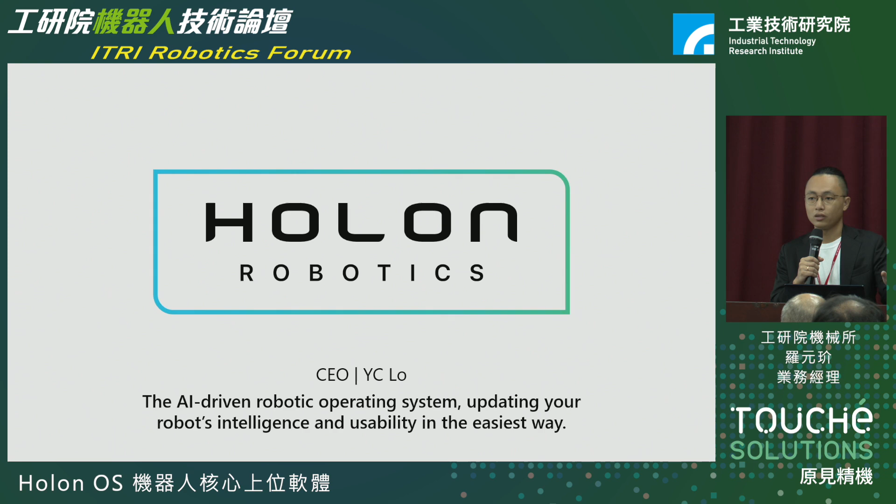We are a startup currently incubated in ITRI, and our vision is to develop the first AI-powered robot operating software to turn standard and general robots rapidly into intelligent multitask robots. So that's our vision. But first, we have to take a look at the current robotic systems.

Here's one fact. There are only 90,000 robotics operators and engineers around the world, but the number of industrial robots in operation is 40 times the number of robotic engineers. And the number goes crazy, to 100 times, so you can easily feel the intensive workload of the robotics engineers. But it also points out two facts. First, the rising robotic automation needs. And second, the labor shortage issue, because for the young generation, it's really hard for them to be willing to go to the manufacturing field.

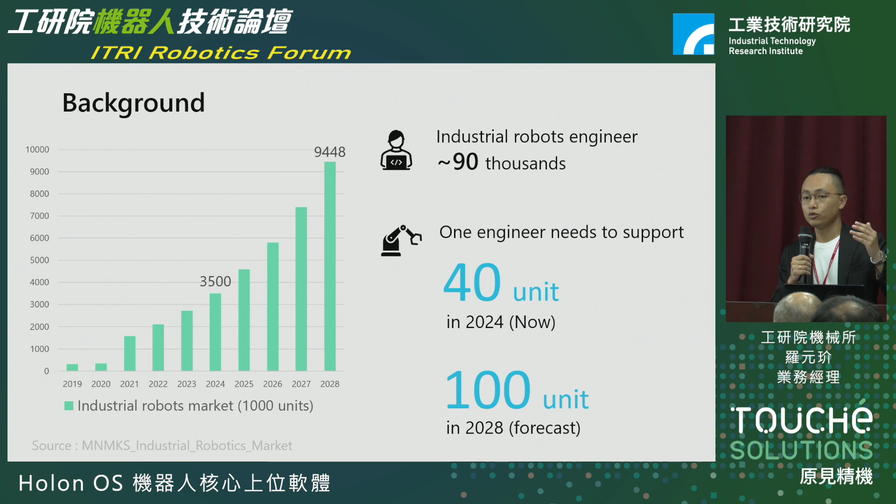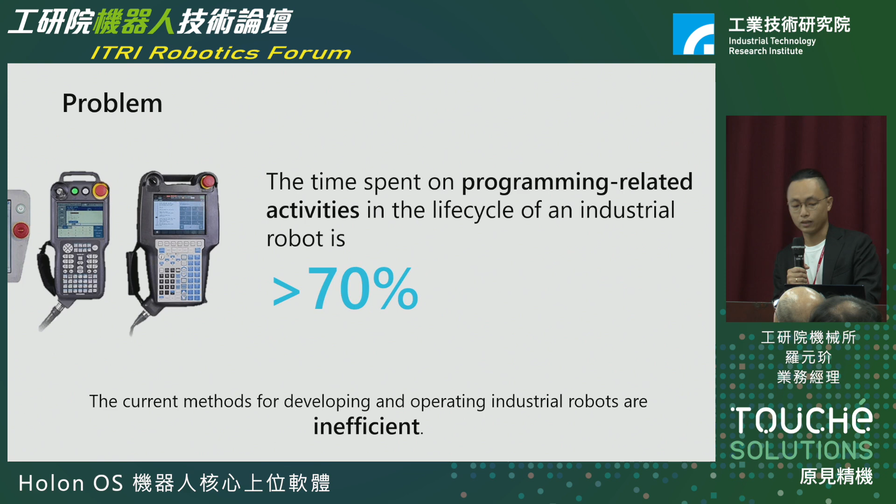So the problem is, for one robotics engineer, 70% of their time is spent on repeated robot programming to fit one application or one task. And to train a junior robotics engineer into a senior robotics engineer requires 2 years. And for them to work standalone on a project or a new application to test, develop, and deploy, it requires 6 months. So the current methods for developing and operating industrial robots are inefficient.

So our solution is the Holon OS control panel. We provide a new experience for operators and robotics users, not just a responsive touch experience. We also embedded an IPC with the latest CPU and GPU, and our self-developed Holon OS. We support multiple robot brands like Fanuc, ABB, KUKA, and Mitsubishi, and various sensors like 2D vision, 3D vision, etc.

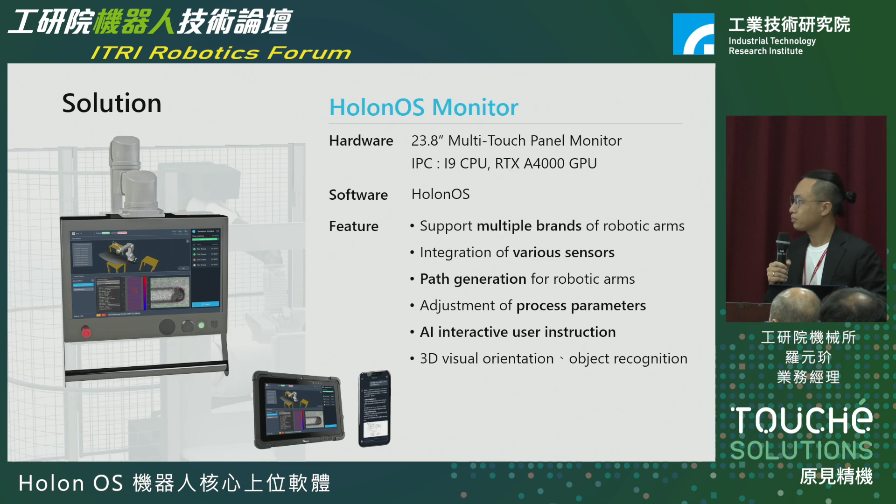And we feature automatic path generation without any programming, and we designed the process parameters to be separate from the path. And also an AI interactive user instruction UI.

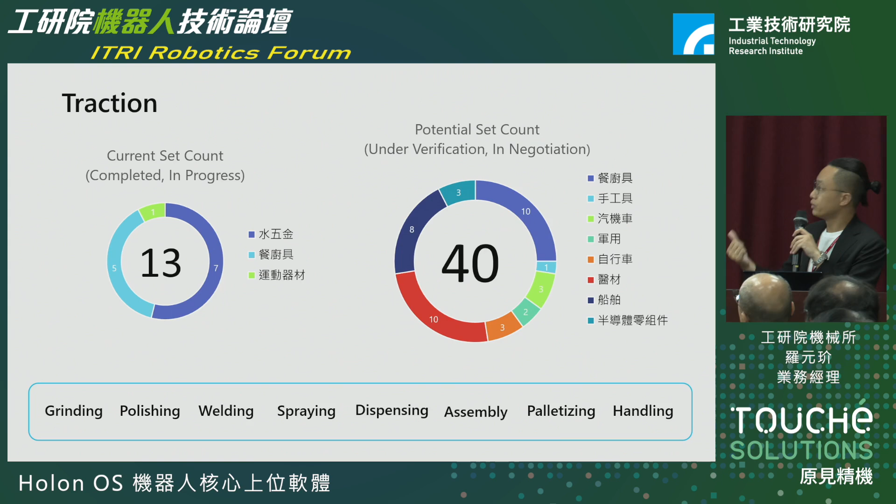As for our recent progress, we have deployed 13 of our Holon OS control panels across multiple fields, and there are potentially 40 units in discussion and negotiation, covering grinding, polishing, and dispensing, semiconductor components, shipbuilding, medical devices, bicycles, and even the military.

One of our success stories is Atlantic Chef. It's a famous kitchenware knife manufacturer in Taiwan. Before us, because they are a niche market, no system integrators could help them overcome the problem. The challenge they faced is that, due to the pre-processing in manufacturing, there is inevitable size variation. So traditionally, a fixed-path robot for grinding and polishing is impossible.

So 2 years ago, we used our Holon OS and laser compensation technology to help them overcome everything. And last year, we deployed the second repeat order and finished in 3 months. And right now, they have 20 existing industrial robots ready to upgrade to the new intelligent software. And they have increased production capability by 30%.

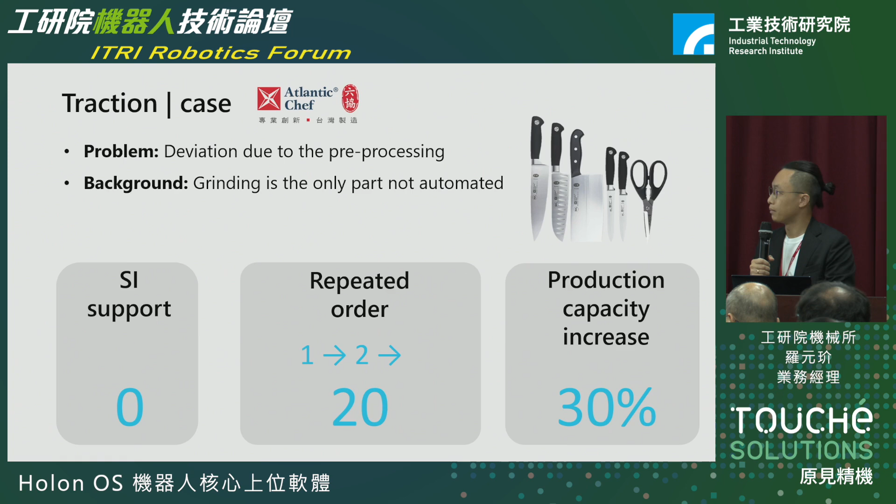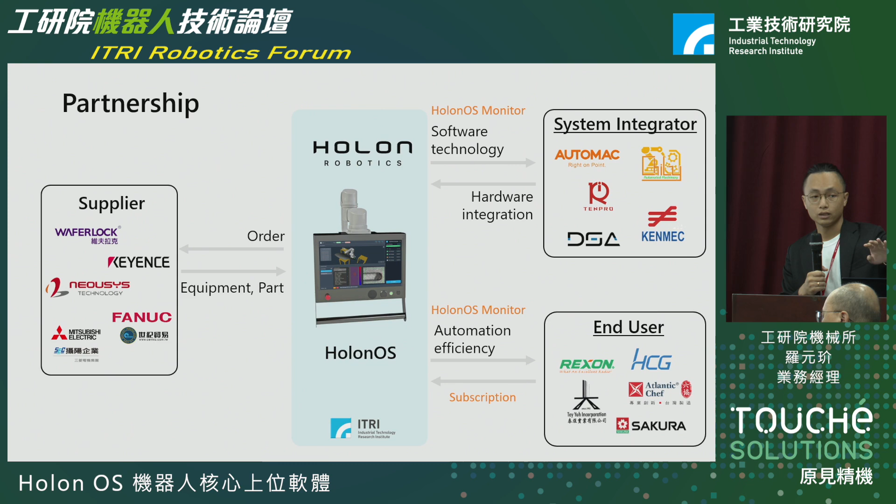So we are a startup. Our business model is building strong collaboration with key partners like IPC, robot, and sensor makers. We integrate and make it into ready-to-use and easy-to-use functions and sell to system integrators, to help system integrators in Taiwan quickly go to the international market and sell to end users.

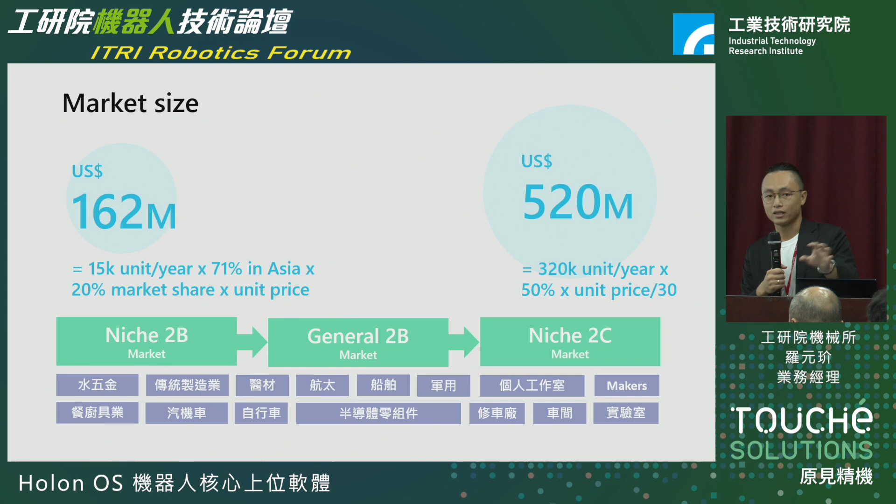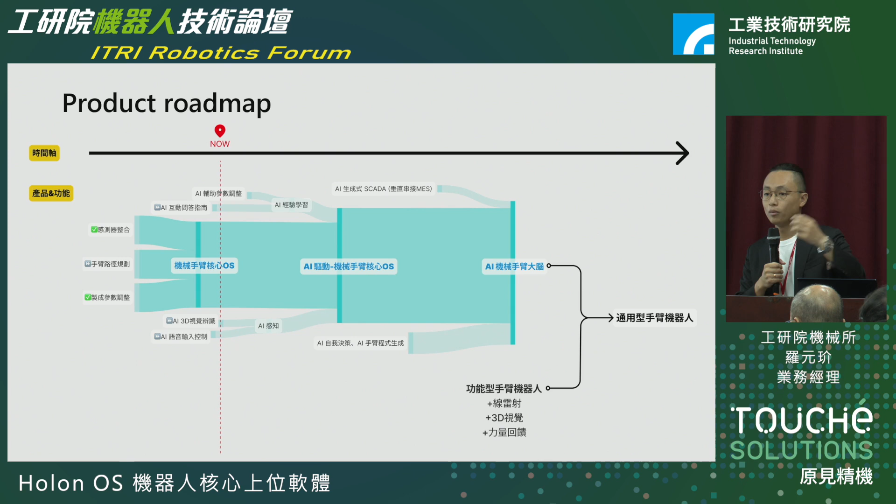Personal workshops, makers, and even repair stations or laboratories require robotic hands or robotic assistance. And along with that, there will be a lot of AI, robotics, and safety topics. So in the roadmap, you will see the reason we try to develop fully automated and intelligent robot brains. So when the day comes, you can buy a cheap and affordable robot system for your home or your laboratory.

So right now, we have integrated multiple robot brands, multiple sensors, and even PLCs. And we especially designed each technical function as a modularized block. You can think of it as a neuron of the robot.

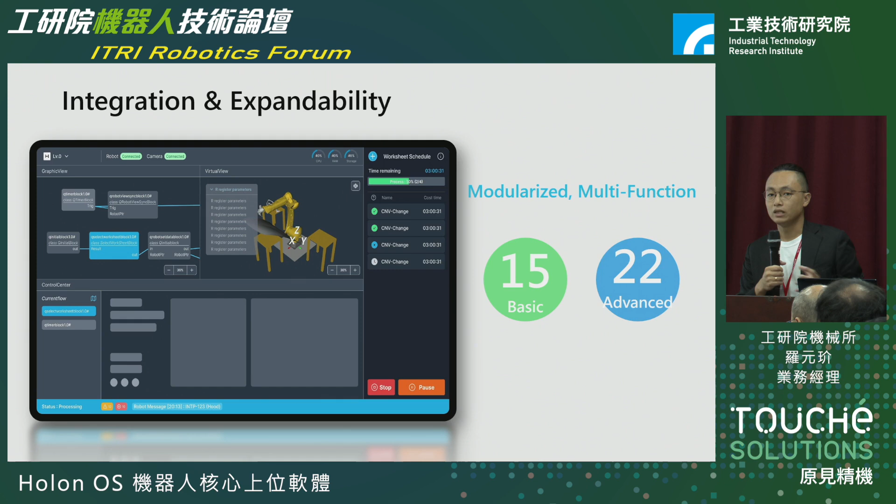So when the scenario needs a vision or needs a laser to activate the topic function, we design a no-program control for the operators. They don't need any training, just 30 minutes. They can quickly change the robot path to make the manufacturing achieve.

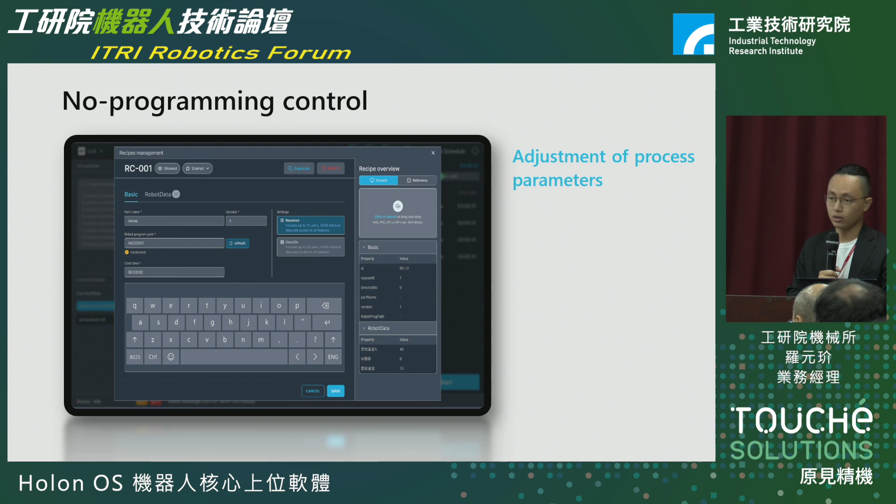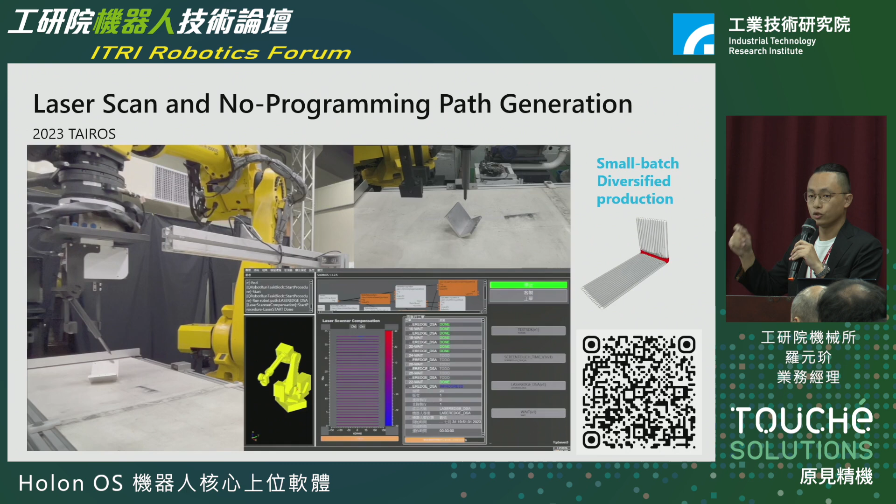So this technology is MVP. We use the laser sensor to do the auto path generation. And you can see the robot comes along with the laser and a tip. So after scanning, without any fixtures, you can automatically generate the path. We target it for the welding processes.

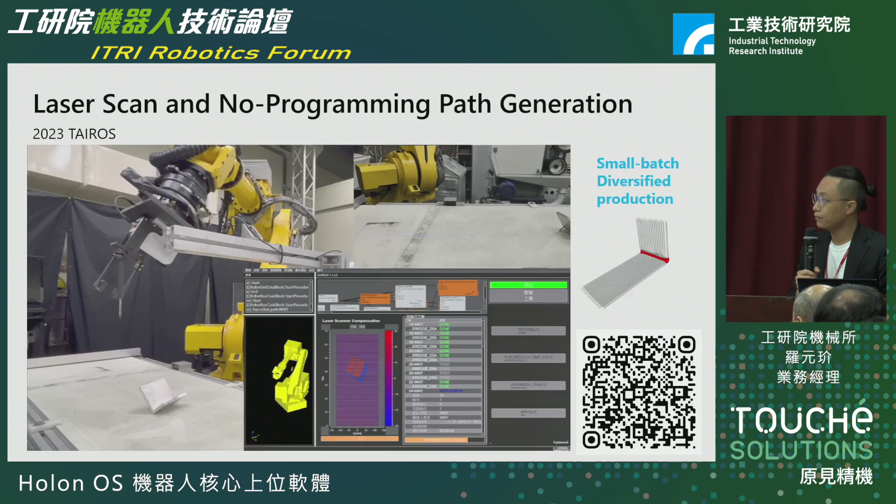And with the same power, we can also use the laser to do the size variation or size check and quality. This is a toy model for the aircraft. And you can see the instantly generated path.

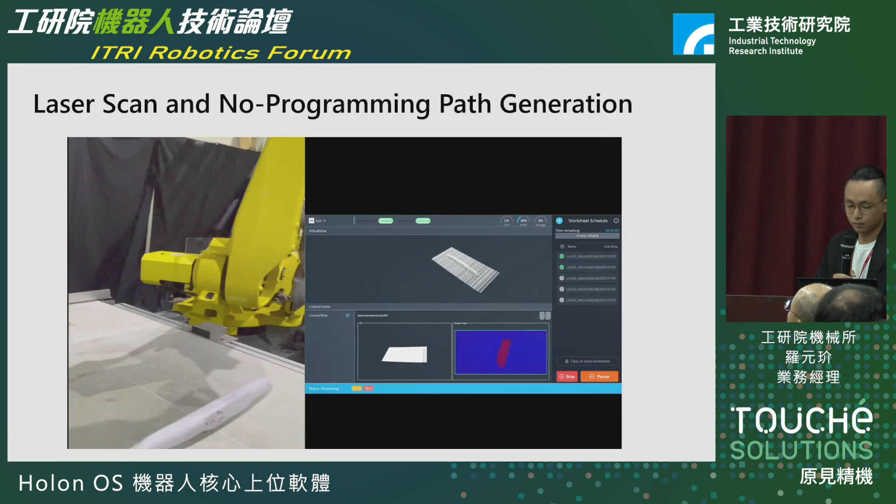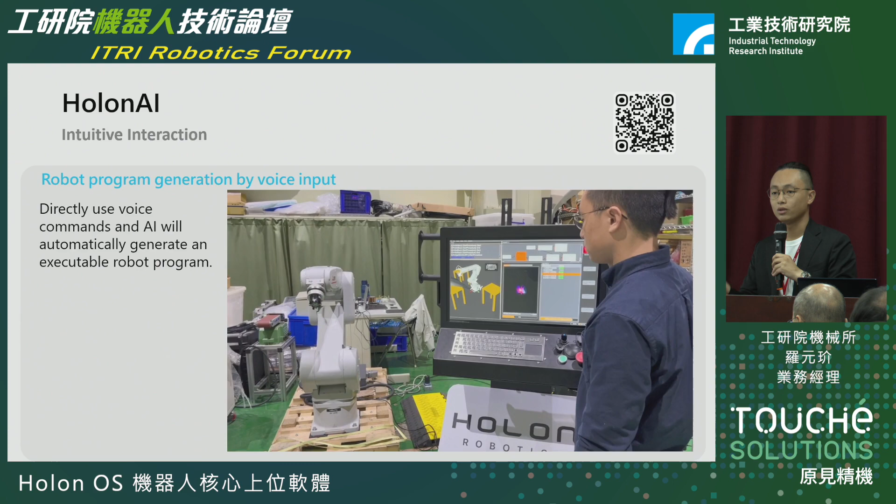And also, we try to test the ChatGPT API, the limitation of that. So we use the Mitsubishi robot and use the ChatGPT API with some fine tuning. We test the results. ChatGPT API is really strong, but the top is 80%. 20% of the ChatGPT AI will generate errors like syntax errors, etc.

And for the other AI-related topics, we try to make the operation much easier for the robot. So we design a path generation with quick adjustment with the parameters. And after the experienced worker changes the parameters, our Holon OS will instantly record and ask the user why do you change it, to make it an experience story. So you can see the experience story for the operation. You can see it's just a note operation.

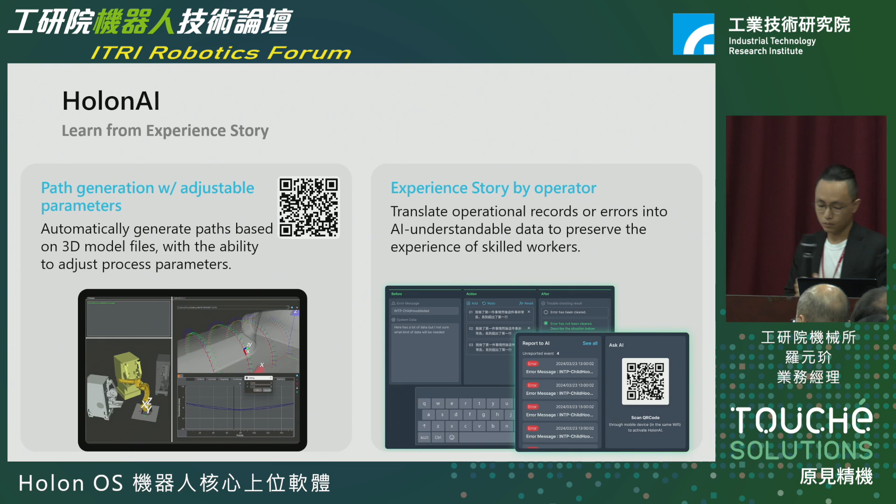And we will try to make the robot understand the world and see what's happening. So we include the vision. Let the robot scan the environment. So the next step will be the segmentation and recognition. So in the future, you can use the large language model to ask them to pick up something or do some process.

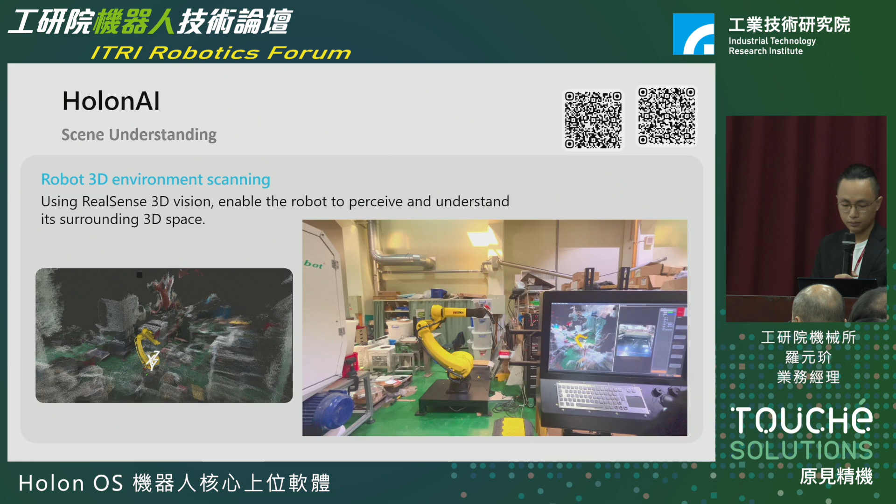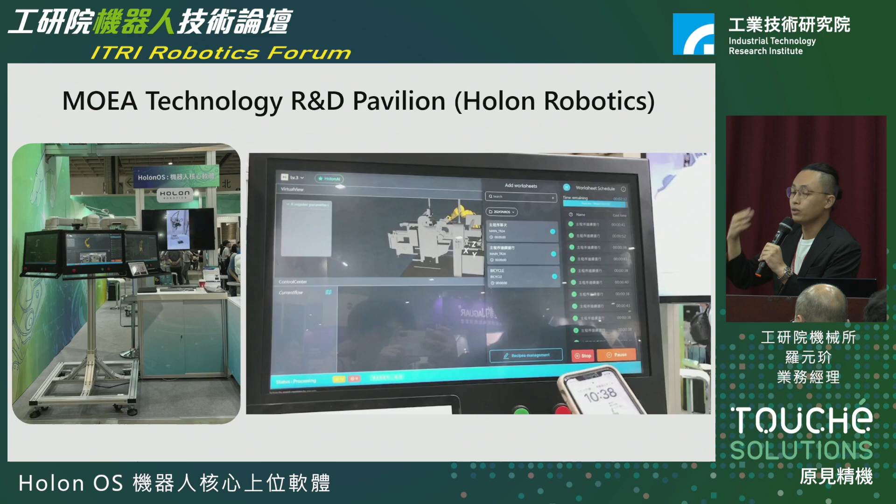And this year, we demonstrate three key technologies. First is the user experience AI. We record everything on our Holon OS, and after you change the parameters, it will show the page to notice the operator. You have to fill in the experience story: before, why do you change it, and after, is it going the good way or going the bad way. And after that, this experience story will be the training data and the training resource for the AI.

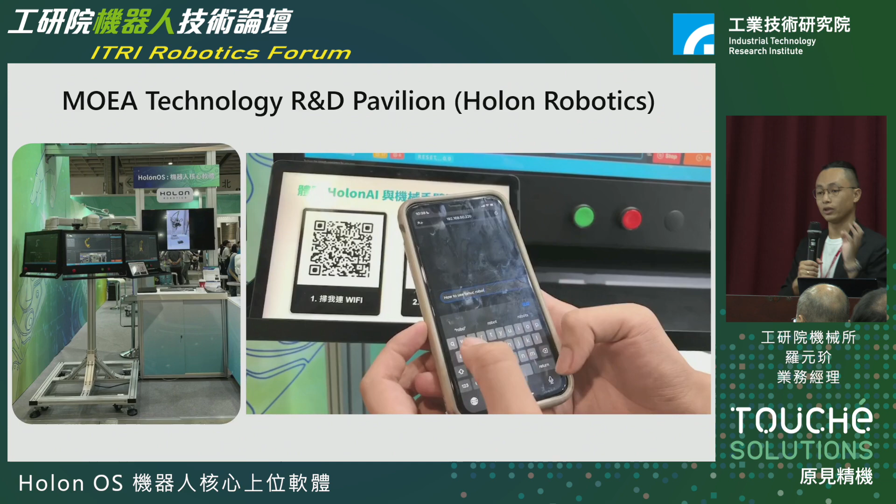So you can just use the phone to scan the QR code on the Holon OS panel. It could instantly tell you how to operate it. So basically, we increase the experienced workers in the manufacturing floor, because one experienced worker can train their data on the Holon OS panel, and our software can teach other junior operators.

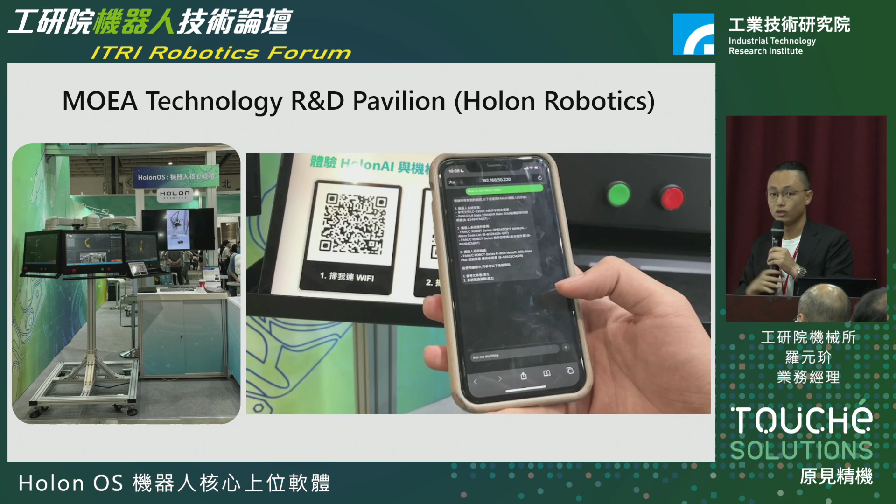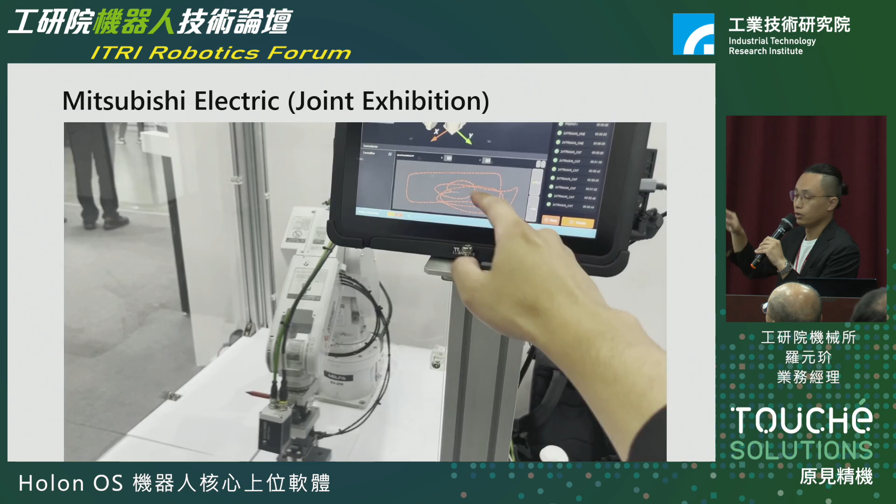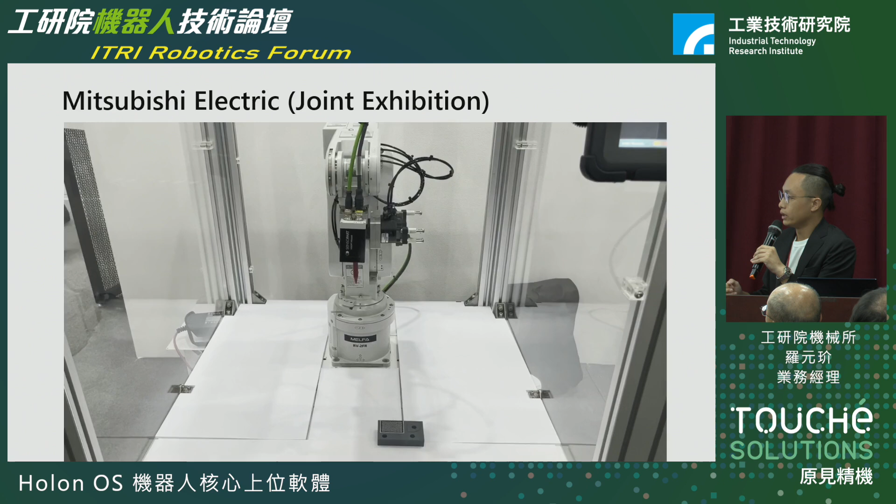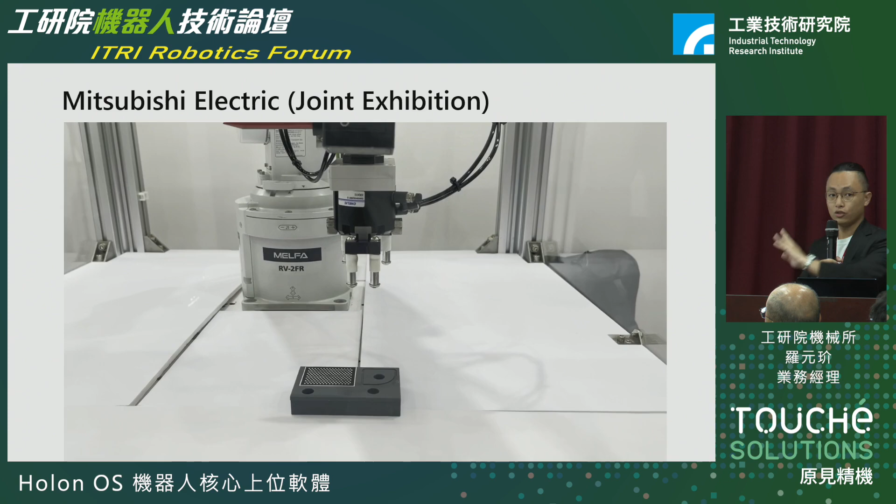And here is another demo in Mitsubishi Electric. We use the touch control panel so you can easily control the Mitsubishi robots within 0.5 second delay. It's really instant. And after that, we integrate the sensor part, vision. When the fixture or the parts have localization errors, we use the 2D sensor, 2D vision, to relocalize them and perform the same task. And if you're really interested in this, you can go to the Mitsubishi booth to see them.

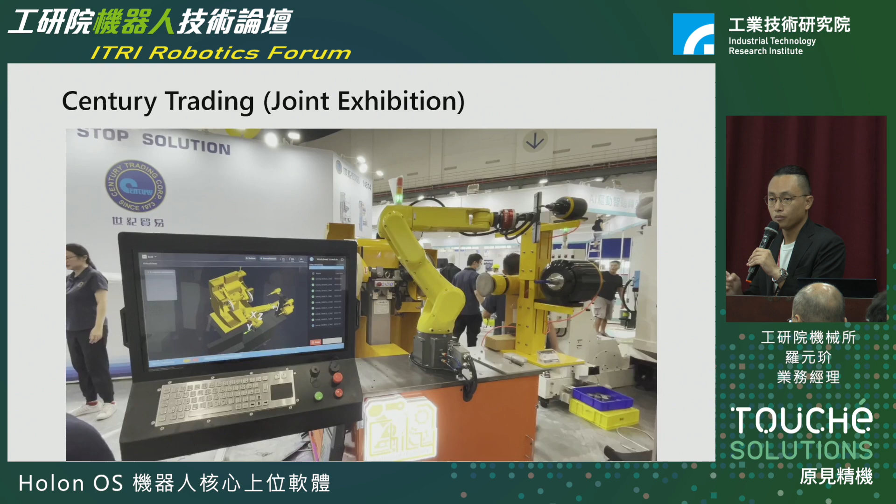And there's another FANUC example. It's also in the FANUC booth this year. We demonstrate integrated force robotics grinding and polishing systems. Powered by our Holon OS software, you can use multiple grinding tools and use the force sensor to measure the variation piece by piece. Because the force control right now is really not practical to change instantly, but it has knowledge to change the next one.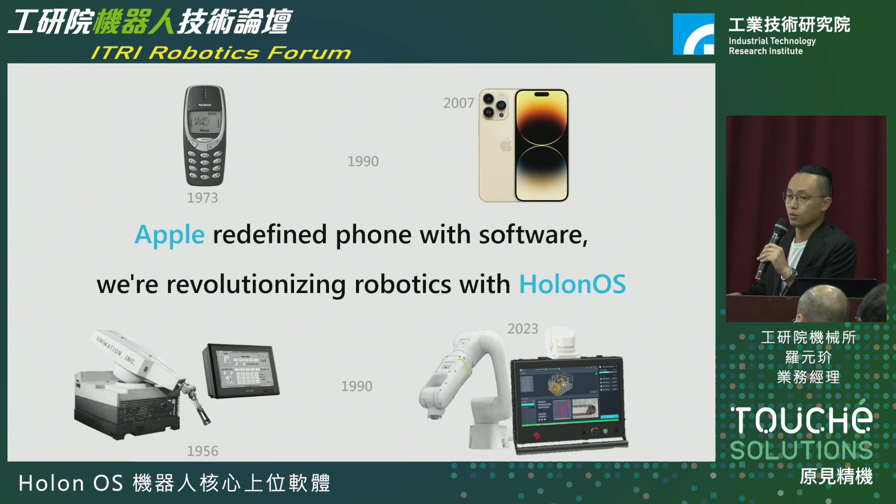So as a startup, what we're doing should be simple. Back in 1970, the mobile market was hardware dominated. So the mobile phone had 1 to 9 buttons and limited functions. And since Apple released the iPhone, we are aware of the experience that we can download apps to make the phone multifunctional. And right now we're doing exactly the same thing. We're revolutionizing robotics with Holon OS to break the rigidity of hardware.